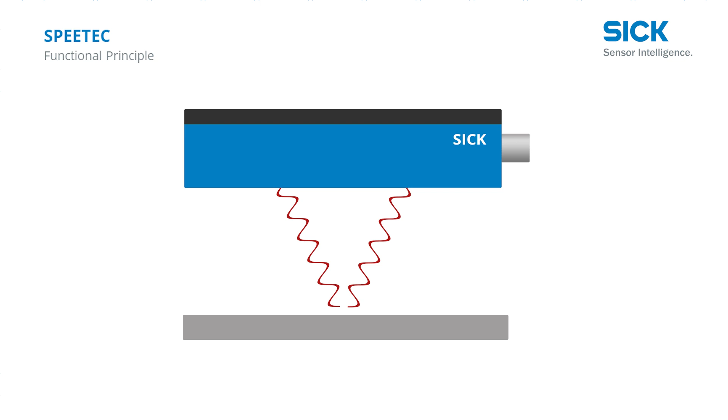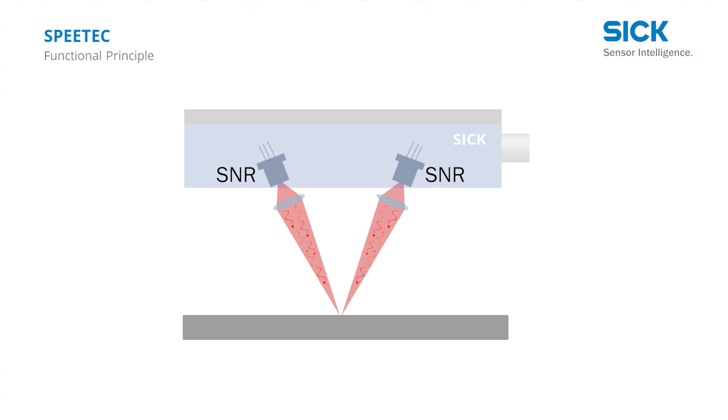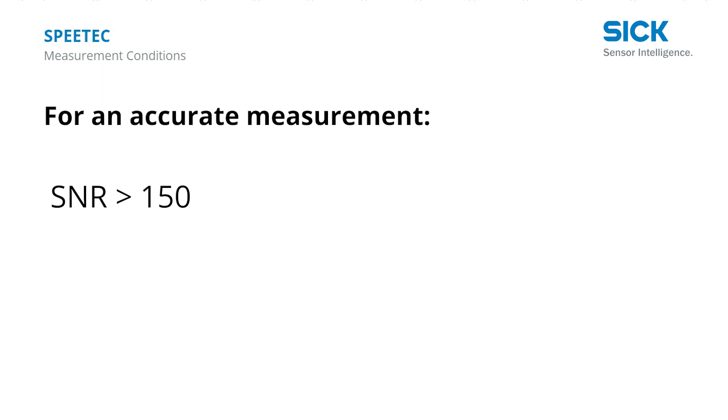SPEETEC sends laser light to the surface, which is reflected from the surface. SPEETEC receives the reflected light, and the strength of this received signal is called SNR. The SNR received by SPEETEC depends also on the distance between material and the sensor and the material itself. An accurate measurement of SPEETEC can be achieved if the SNR value is permanently larger than 150 and the speed signal loss indicator is permanently below 0.2%.

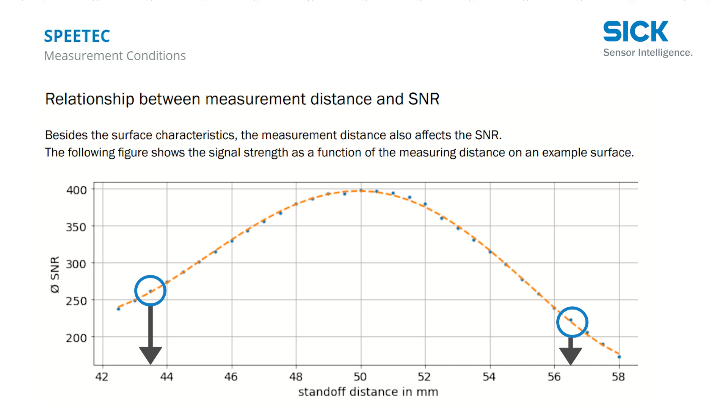This chart here shows the typical SNR curve at different distances. As you can see, the highest SNR is achieved at nominal standoff distance, while the larger and shorter distances will result in a lower signal strength. Now I demonstrate this on different material.

For the test, we use the following setup. SPEETEC sensor is mounted on the moving head of a linear axis. This way we ensure a slip-free and reproducible movement. The standoff distance of the sensor to the material can be adjusted. The linear axis will move 700 millimeters at a speed of 0.2 meters per second.

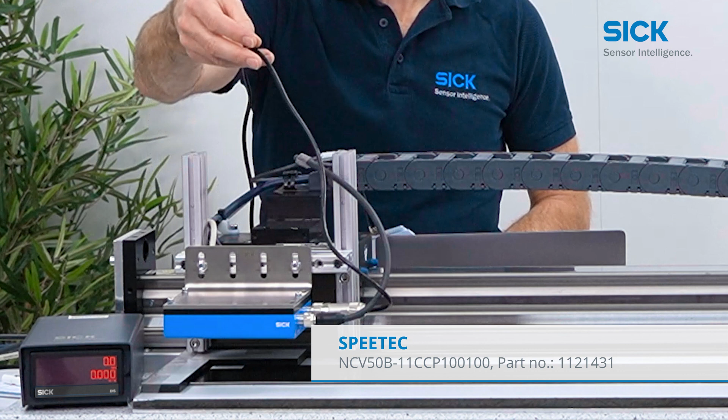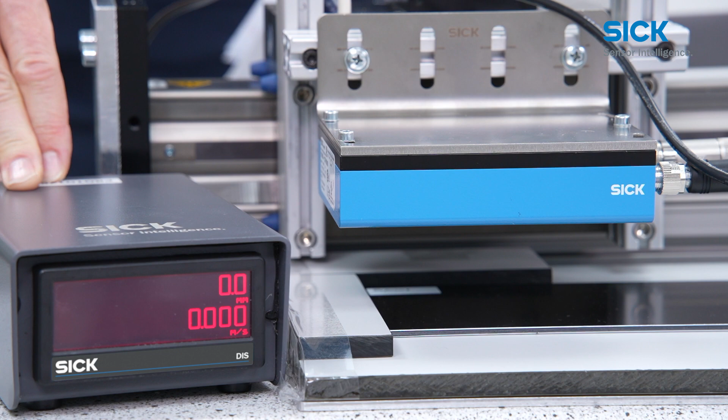SPEETEC is connected to the laptop with the programming cable and to the incremental counter. The measured speed and length value will be displayed on the incremental counter box. The sensor behavior can be monitored in the SPEETEC diagnostic interface. To use the diagnostic interface, you need to use a programmable device.

For the first measurement, we use a smooth silk matte black surface. This is our reference material for the datasheet. Such material only gives little diffuse reflection from the surface, which is resulting in a low SNR. SPEETEC is mounted in nominal position of 50 millimeters. We now start the axis and the sensor starts moving.

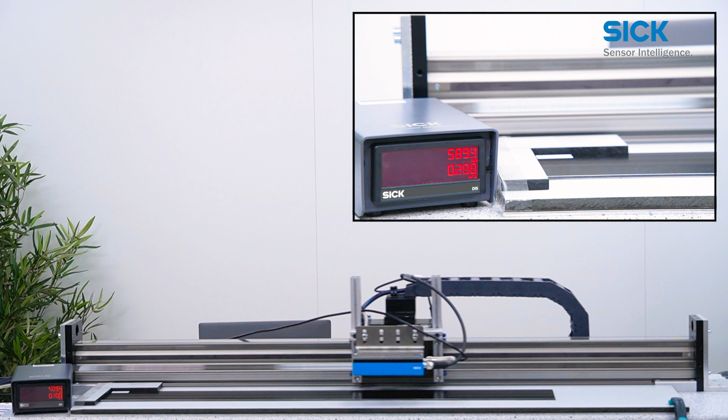On the counter we can see the moving speed and the total length, which is 700 millimeters. On the diagnostic screen, we can see the SNR and the speed values. On the diagnostic interface, you can see that the SNR is about 200.

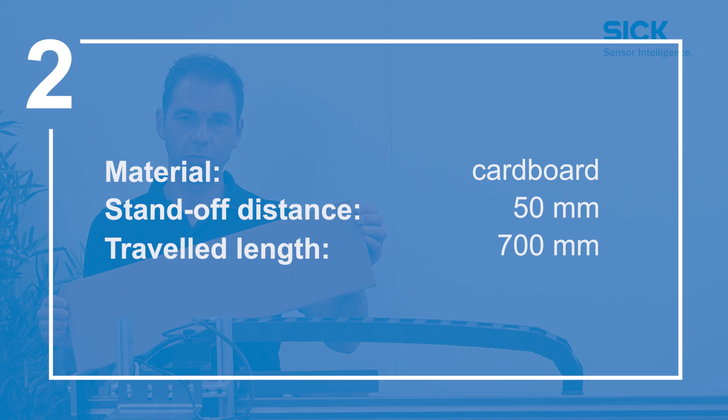The next material we test is cardboard, which is commonly used for corrugated paper or packaging. We start the measurement again. The counter shows the speed and the length, which is again 700 millimeters. On the SOPAS diagnostic screen, we see that the signal-to-noise ratio is above 6000, which is significantly higher.

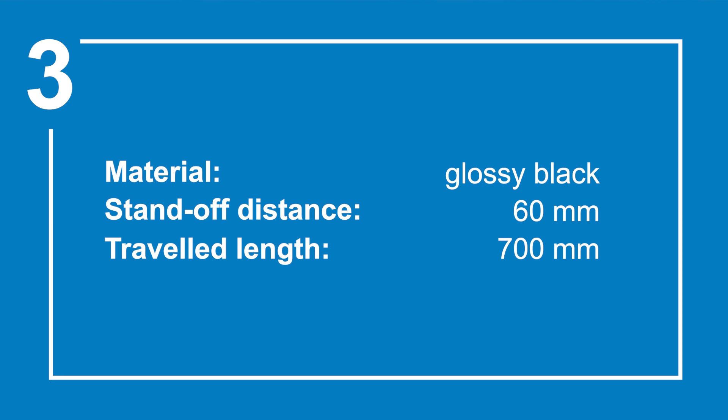We increase the standoff distance to 60 millimeters and measure on the reference surface. This distance is outside the specification as it's above 50 plus minus 5 millimeters. Now we perform the measurement again. The cumulated length is just below 700. So the measurement was inaccurate. On the diagnostic screen, you can see that the SNR is just around 50, which is too low.

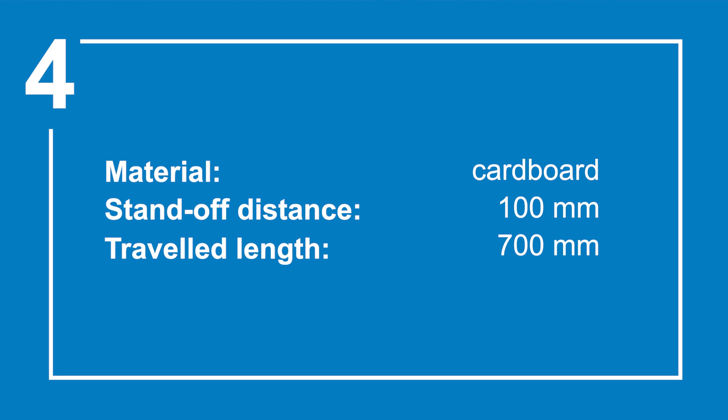Now we will challenge the SPEETEC sensor. On the cardboard, we will use a measuring distance of 100 millimeters. This is twice the distance as the nominal distance. Now we will start the measurement. The counter again shows the speed and the length of 700 millimeters. The SNR on the SOPAS screen shows you about 200, which is still sufficient.

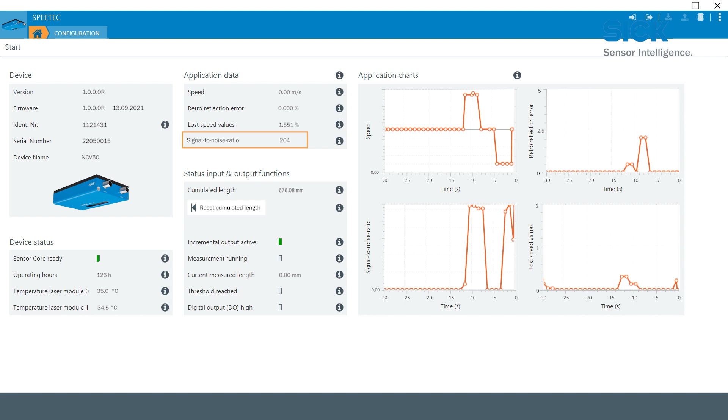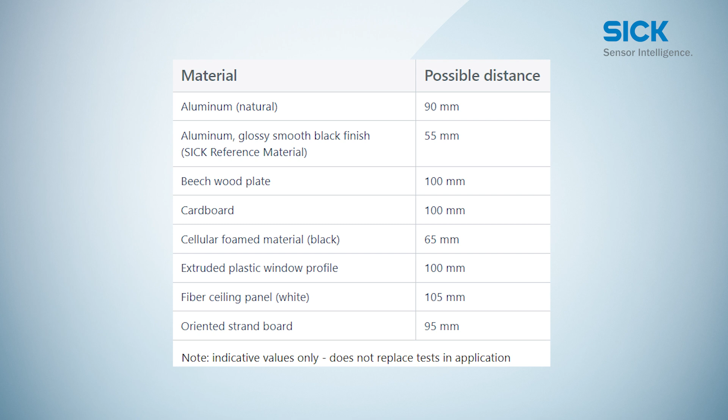As you can see, the SNR is dependent on the material. We made more tests on other material, and here's a rough indication what can be achieved. The distances shown in this table are for reference only, and are only valid for the specific tested material and test setup. Now let me summarize what you have seen in this video.

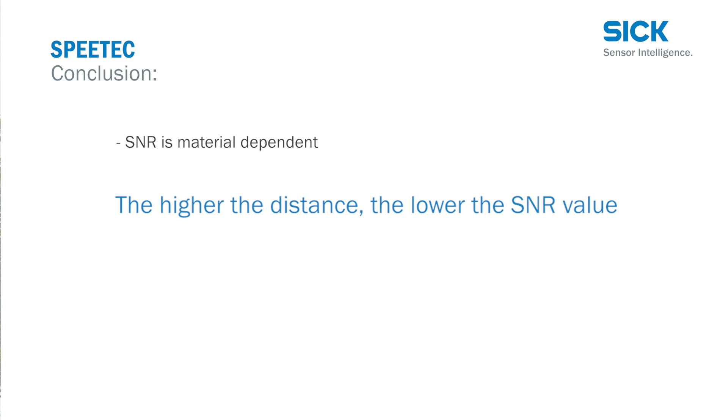Different materials cause different reflections into the sensor, which result in a different SNR value. The higher the distance from the material, the lower gets the SNR value. Our datasheet values for the nominal distance of 50 plus minus 5 millimeters are based on a very challenging material and include a safety factor for aging of the sensor.

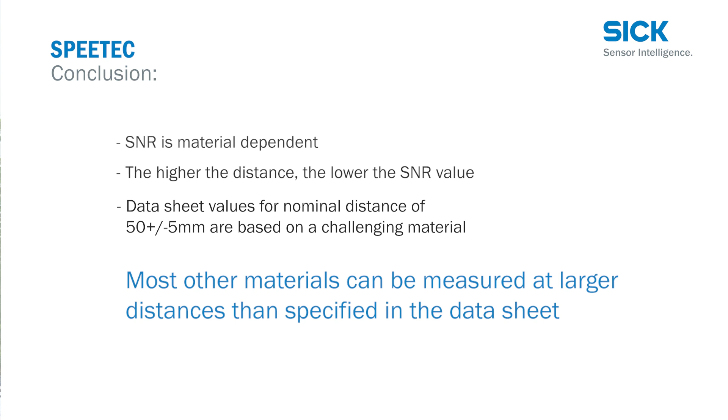Most other materials with higher SNR at nominal distances can be measured also at larger standoff distances than specified in the datasheet. With the diagnostics function of the programmable SPEETEC, you can check yourself if the SNR is large enough to measure the material at a desired distance.

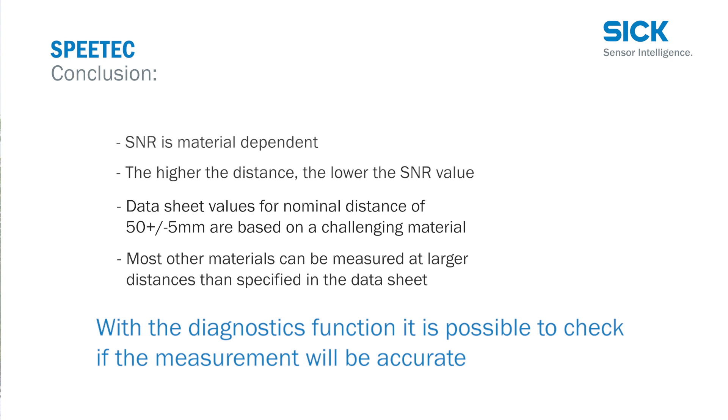Another influence on the SNR is the speed of the movement. If you want to know more about the influence of speed, please watch the upcoming videos.